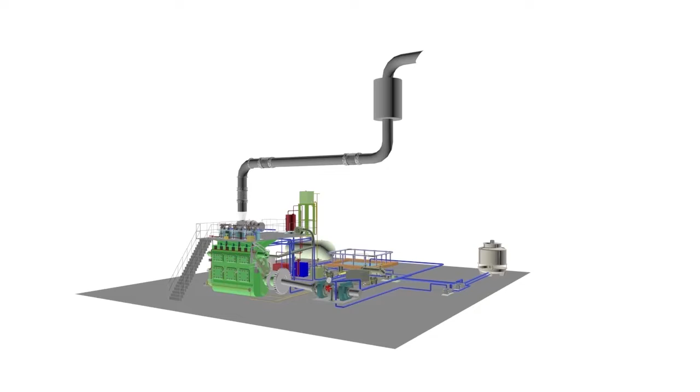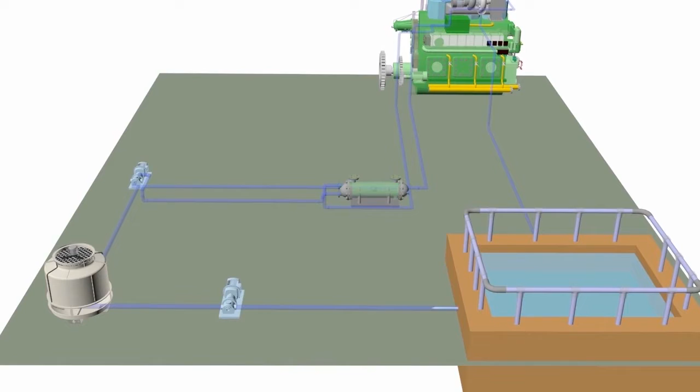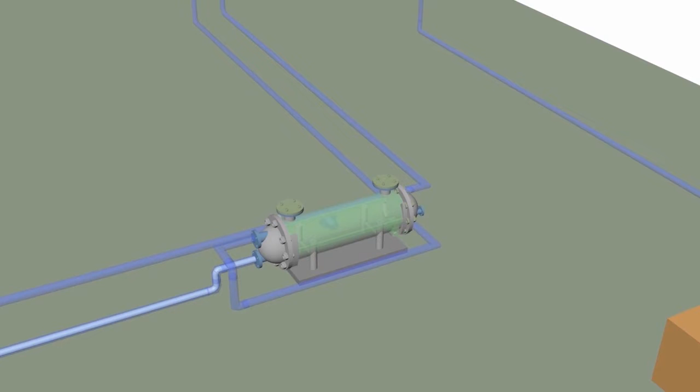The jacket cooling pump, of a centrifugal type, pumps the jacket cooling water to the L.O cooler where it cools down the lubricating oil of the main engine. The freshwater system also plays an important part in cooling the main engine jacket cooling system, where it will flow through the piping system through a manifold located behind the cylinders of the main engine.

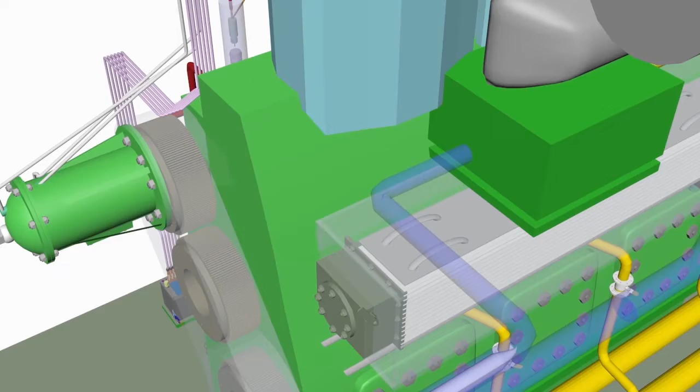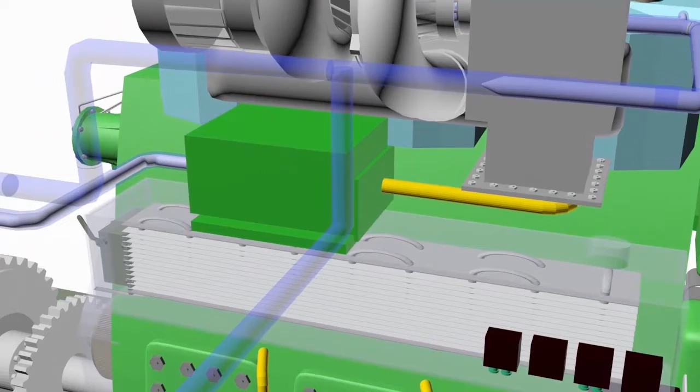It is then diverted to the cooling path of the liner where it will flow to the cylinder head for cooling of the cylinder head system, then will flow out to a series of ports, which then will flow to the water reservoir, which completes the cycle. Apart from that, if the temperature is still cool enough for the system, it will return back to the suction line of the jacket cooling water pump. This temperature and pressure is monitored by various thermometers and pressure gauges.

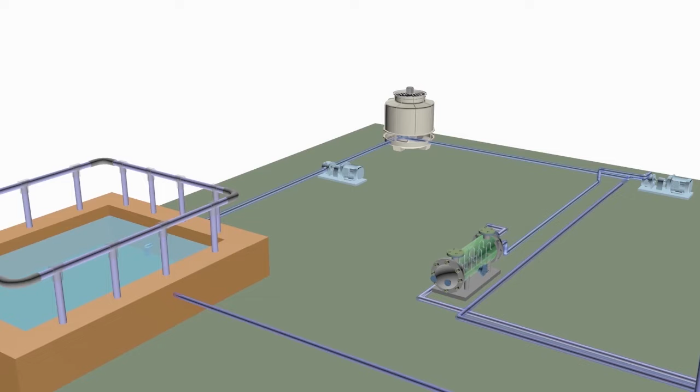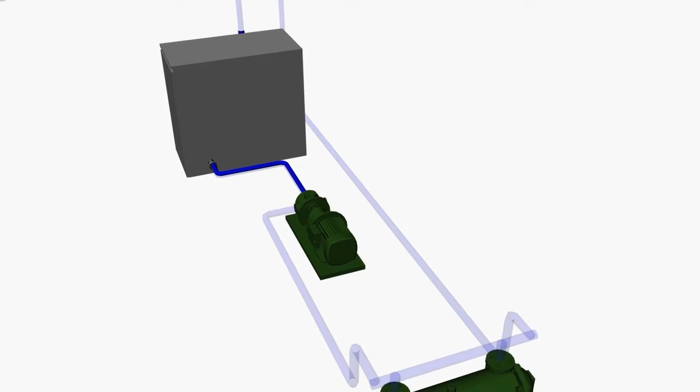Fuel injection valve cooling system. The fuel injection cooling unit is used for cooling fuel injection nozzles of the diesel engine, to keep the diesel nozzle automatically and lastingly cooled by circulating water or oil through cooling passages. Heavy fuel injectors are fitted with water-cooled nozzles. The operation starts from the expansion tank, where the circulating pump draws water from the expansion tank, where a series of thermometers are, directly to cool down the nozzle.

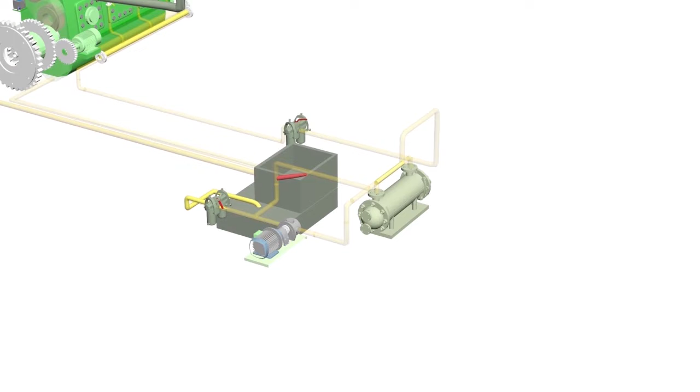After cooling the nozzle, the water then flows out to the sight glass used for detecting the flow of coolant through its nozzle, which then eventually flows back to the expansion tank. Main lubricating oil system. The main lubricating oil system comes from the main engine lubricating oil sump tank. The oil in the lubricating oil sump tank is pumped by the gear pump through a series of filters, where it will then go to the lubricating oil cooler.

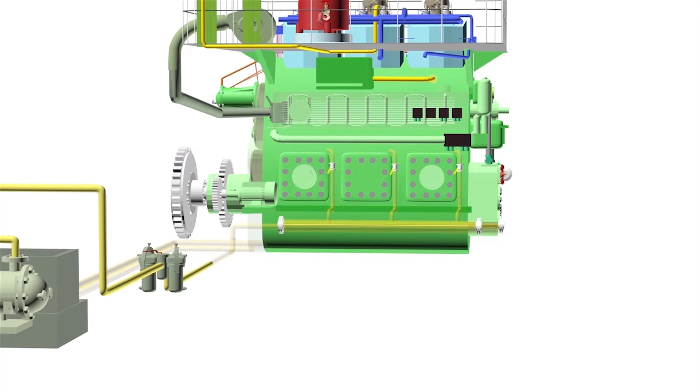This system is also fitted with the emergency lub oil pump to prime the lubricating oil so that it will fill the line before starting the main lubricating pump. When the lubricating oil enters the cooler, it will be cooled by the fresh water system that is used to cool the jacket cooling system. After passing the controlling valve, the oil will then be filtered by a second filter to ensure that any remaining particles are screened off.

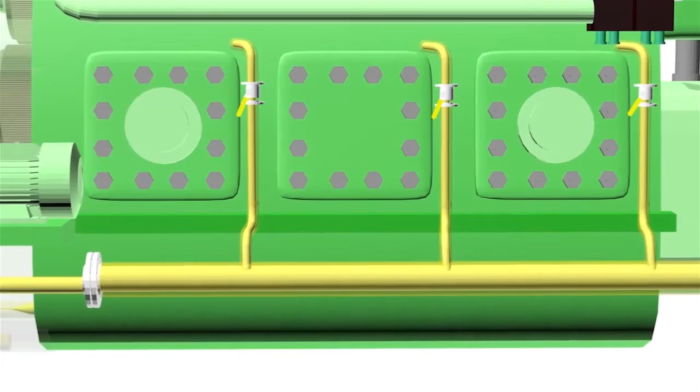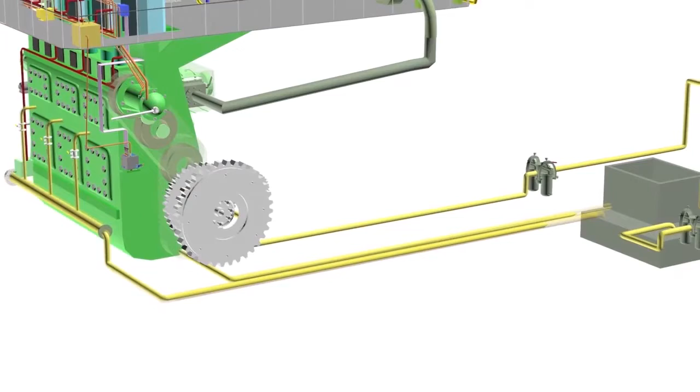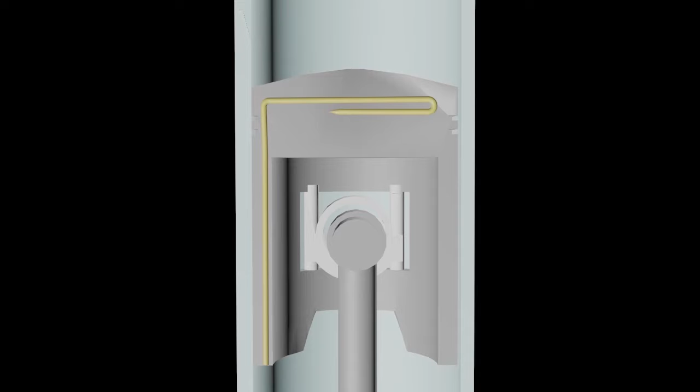Piston cooling system. The piston cooling system is used for cooling the piston crown to absorb heat incurred by the piston. The piston cooling system is a part of the lubricating system of the main engine. The lubricating oil which flows to the main engine lubrication system is diverted to a series of pipes where it enters the telescopic pipe from the underside of the piston.

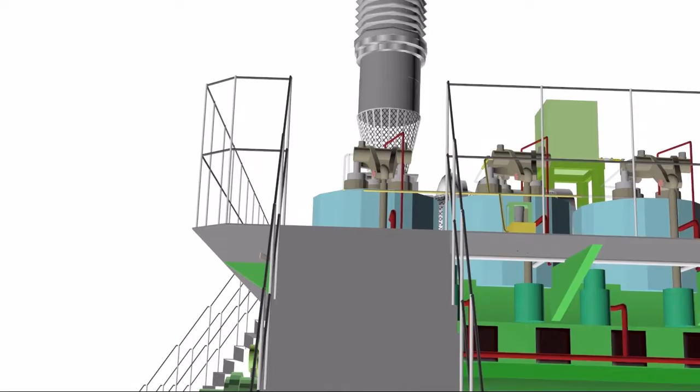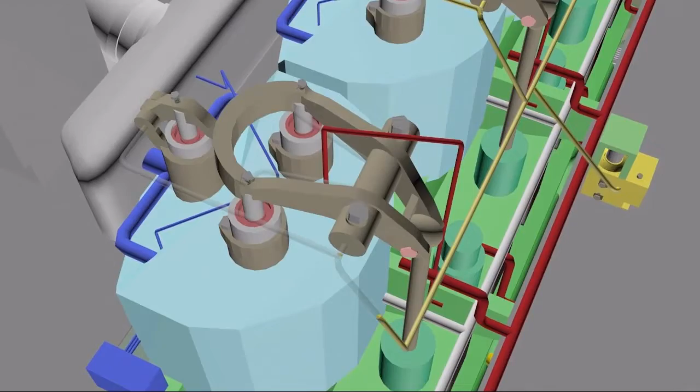Rocker arm lubrication system. The rocker arm lubrication is to provide fluent movement of the rocker arm by providing sufficient lubrication to moving parts such as push rods, bearing bushes, the push rod's ball ends, the rocker arm bearings and the ends of the valve stem.

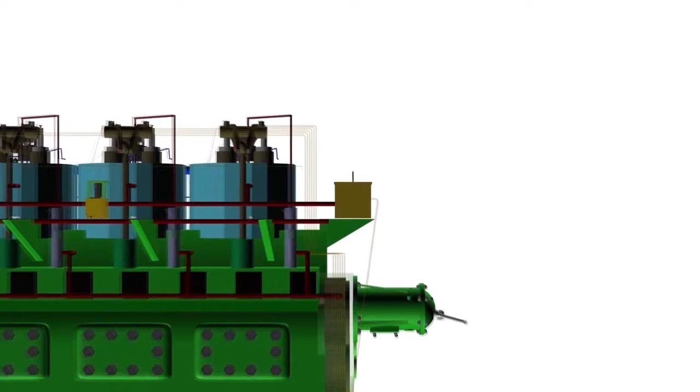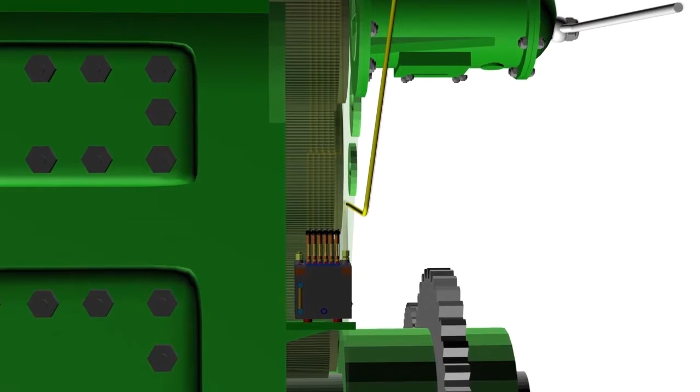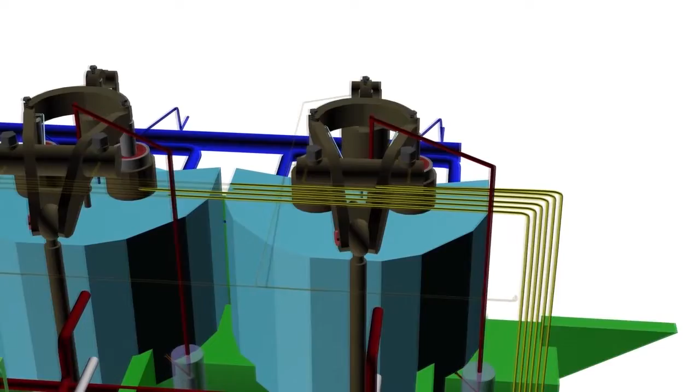Cylinder liner lubricating system. Cylinder liner lubrication starts from the cylinder liner lubricating oil tank. Then it flows to the rational lubricator. Then the rational lubricator will distribute lubrication oil to the cylinder liner at port and starboard of the cylinder liner through the lubricating quill. The lubrication oil will be sprayed at the internal liner surface, the piston ring, and will eventually be burned during the combustion.

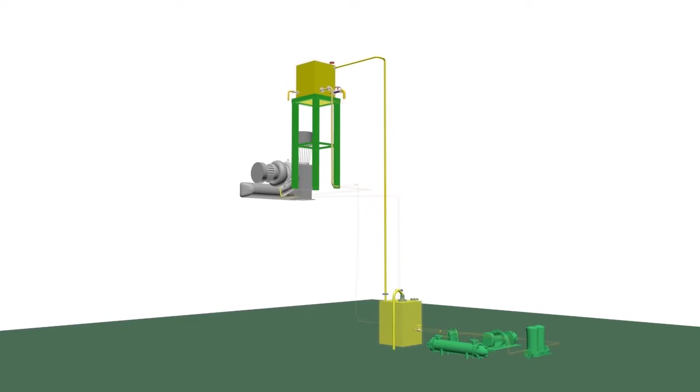Turbocharger lubricating oil system. The turbocharger lubrication is supplied either by an external or internal pumping system. The external system requires a positive displacement pump to supply oil from an external holding tank to lubricate the turbocharger bearings running at high speeds. It is very important that the lubricating oil is clean and free from metal particles that could scratch the bearings.

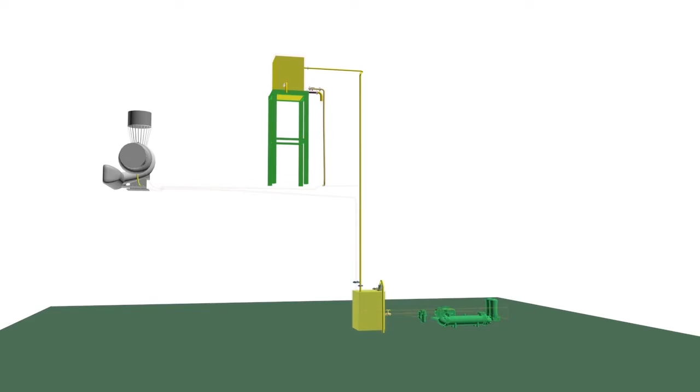The turbocharger lubricating oil system starts from the overflow tank; oil will be pumped by a gear pump to a series of duplex filters of magnetic type. The system is fitted with a gravity tank high above the turbocharger to ensure that at all times oil will remain inside the pipe. This is to ensure that no air can ingress into the system, creating an airlock.

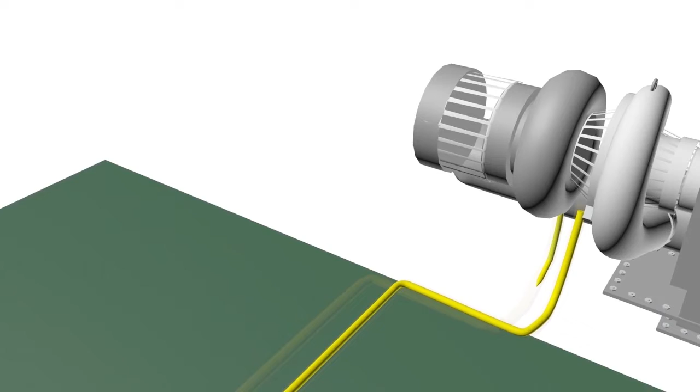Fuel oil system. Marine fuel quality can significantly affect the performance, operation and maintenance of the diesel engine. To better understand the important effect of diesel fuels on the engine itself, it is important to have a basic understanding of fuel characteristics, properties and contaminants which impact the operation of a diesel engine and its fuel handling and

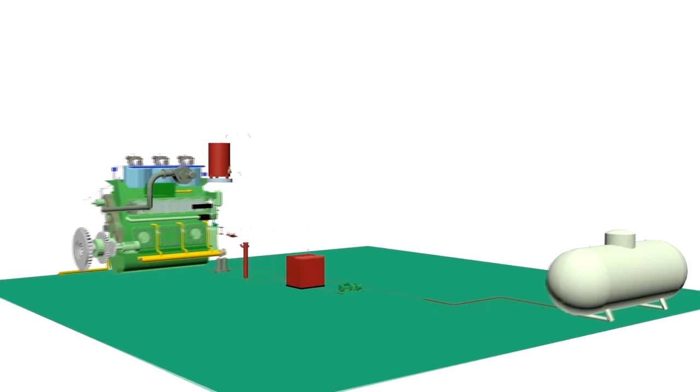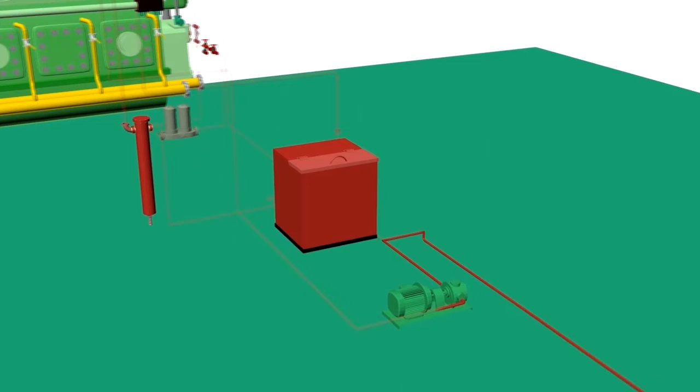fuel treatment systems. The fuel oil system for a diesel engine can be considered in two parts, which are the fuel supply and the fuel injection systems. The fuel supply of this plant starts from the fuel oil storage tank, where it will be transferred via a fuel oil transfer pump to a gravitational fuel oil service tank.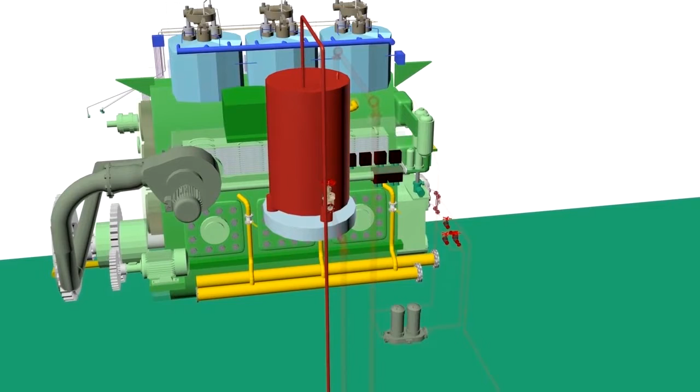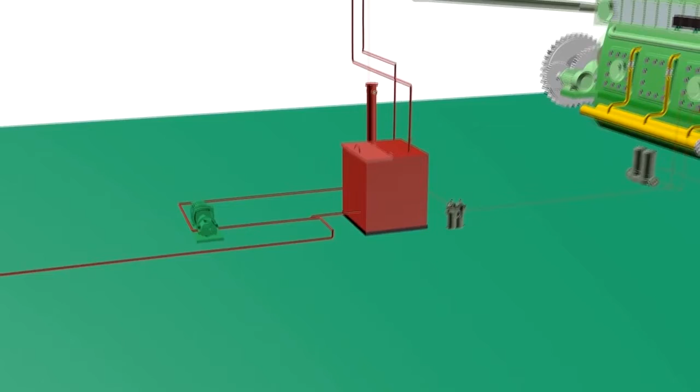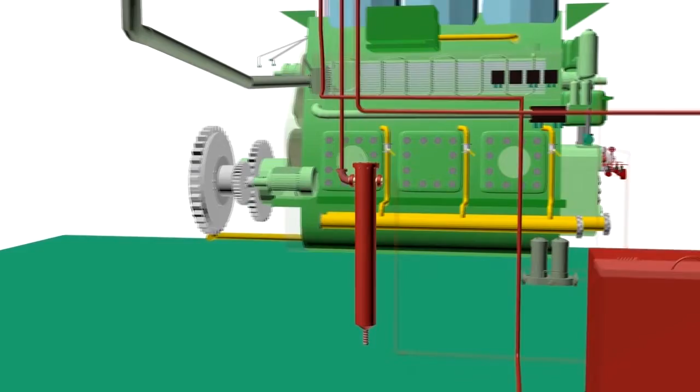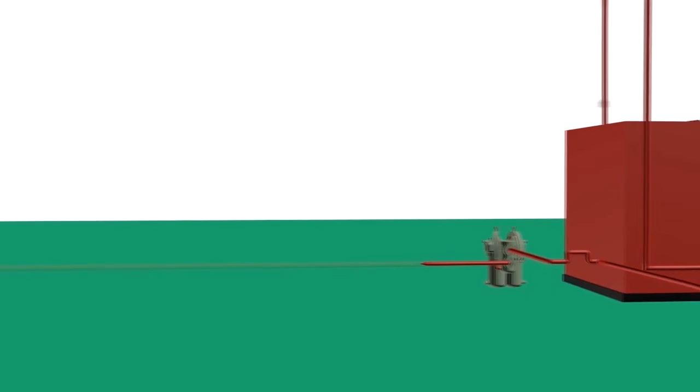During operation the oil is pumped by a gear pump which is attached to the main engine, driven by a set of running gear through the main engine gearing system. Fuel oil will then pass through a series of duplex strainers to clean any particle matter that could choke the fuel injector. After passing through the service pump it will pass through a flow meter where fuel consumption is monitored.

A second duplex cleans fine metal and sludge from the fuel oil system. This oil will then pass to the fuel injection pump where the pressure will be raised to the fuel injection valve located in the center of the cylinder head.

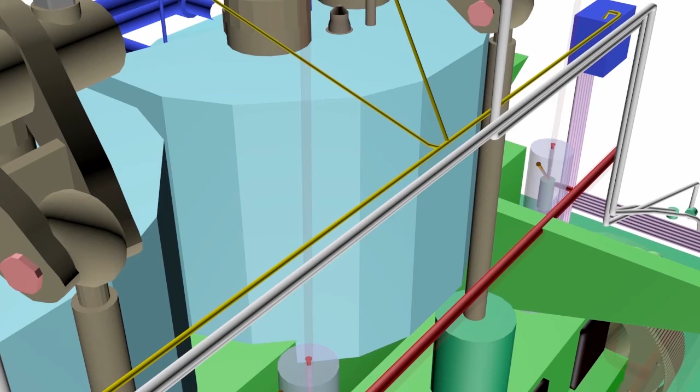The fuel injection pump is operated by a set of camshafts driven by a gearing system at the end of the engine chain drive. This pump is controlled and regulated by the governor through a series of linkages that set the amount of fuel supplied to the injector, and as a result the speed of the engine.

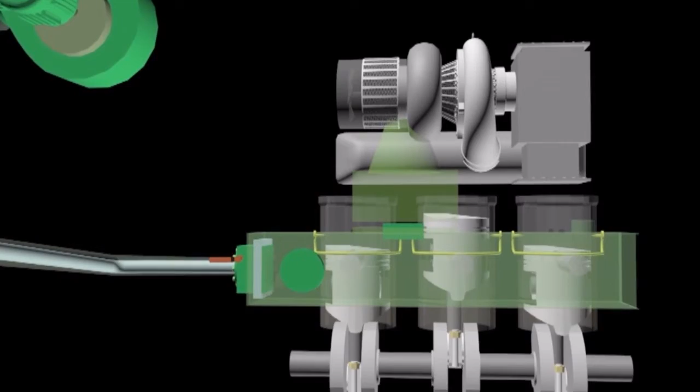Scavenge air system. Scavenge air is provided by an auxiliary blower when the engine is running at slow speed. The auxiliary blower, driven by a motor at high speed, delivers air to a damper, which then will enter the scavenge space before it enters the scavenge port. After passing the port, the air will mix with fuel in the combustion space inside the cylinder and burn to produce power to drive the engine.

After the engine has reached a constant speed, the duty of the auxiliary blower will be taken over by the turbocharger, which draws air through a filter and compresses it to a constant path into the air cooler, where the air will be cooled before it enters the scavenge space.

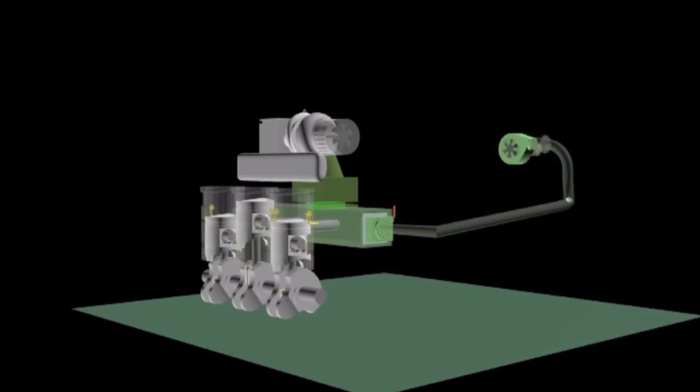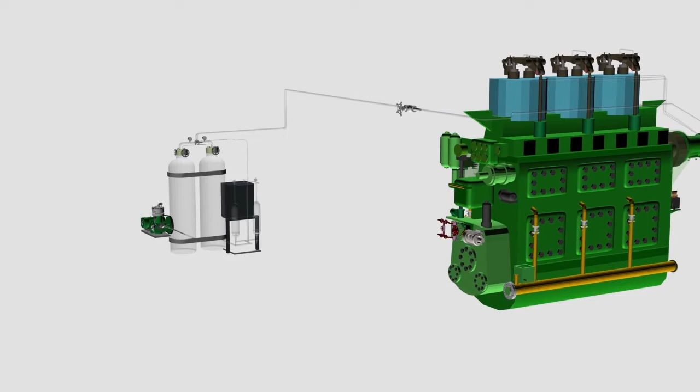Starting air system. Large marine diesel engines are started using high-pressure compressed air. The air is admitted into the cylinder when the piston is just past TDC and continues until just before the exhaust valve opens. There is always more than one air starting valve open, a situation known as overlap. This ensures that the engine will start in any position.

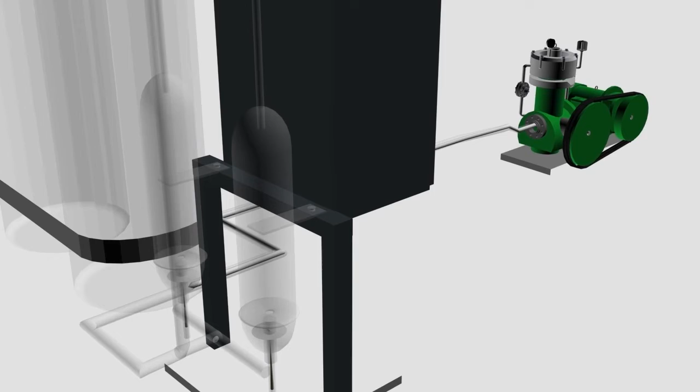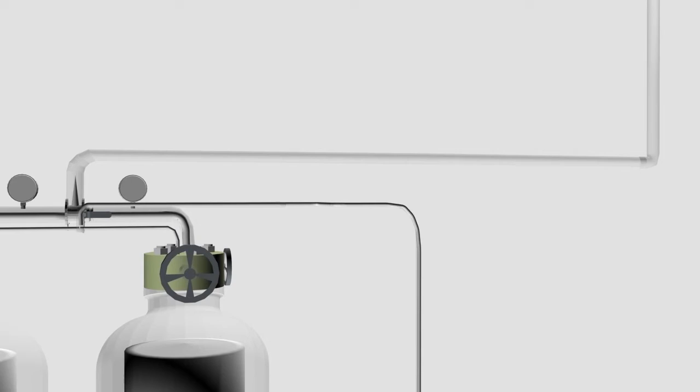The starting air of this plant starts from the two-stage air compressor that compresses high-pressure air to the air dryer, and it is stored in 2 air bottles. To start the engine, air will be supplied to the isolating valve through a main starting air valve fitted at the air bottle. The isolating valve is fitted to prevent starting air line explosion due to a faulty starting air valve. After passing the isolating valve, it will be divided into 2 flow paths.

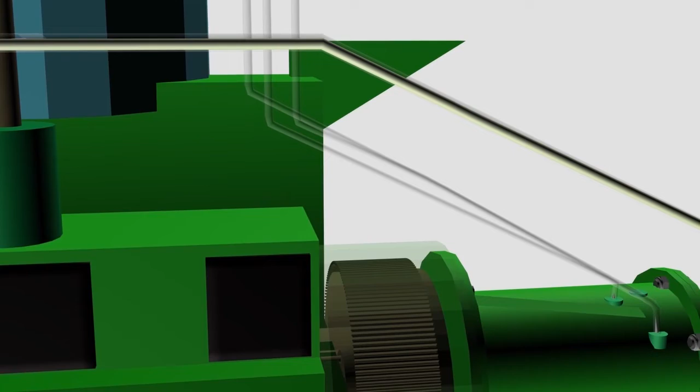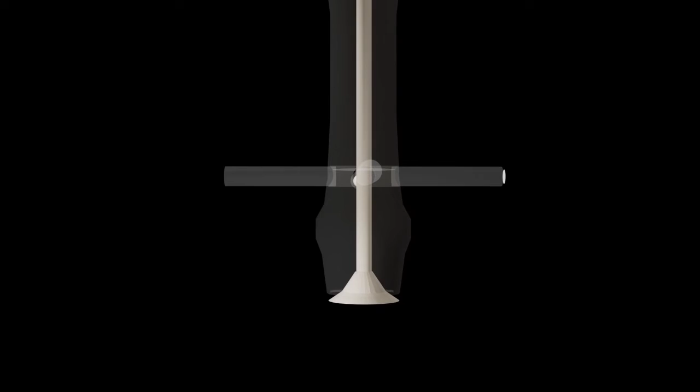One, which is the main starting air, will be ready just before the entrance to the starting air valve fitted to the cylinder head, while the other will go through the set of distributors that correctly time the unit that will first start the engine. It will then direct pilot air to the starting air valve that will let the main starting air enter the designated cylinders.

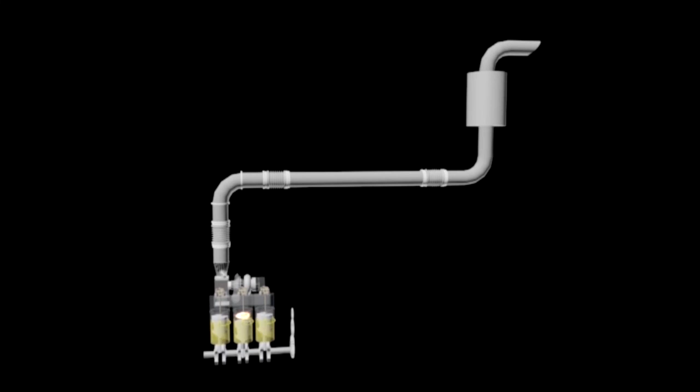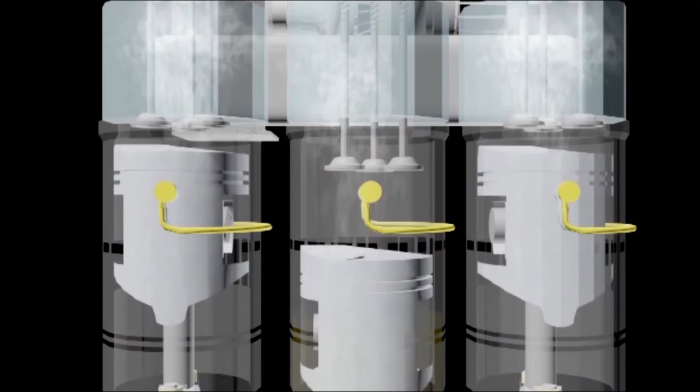Exhaust system. Exhaust comes from combustion of fuel and air inside the combustion chamber. In this plant, the exhaust gas of the combustion chamber is removed through the exhaust valve driven by a rocker arm that has been pushed by a push rod from the camshaft. The high pressure exhaust gas that is removed by the uniflow method will then enter the exhaust manifold, where the pressure and temperature will equalize.

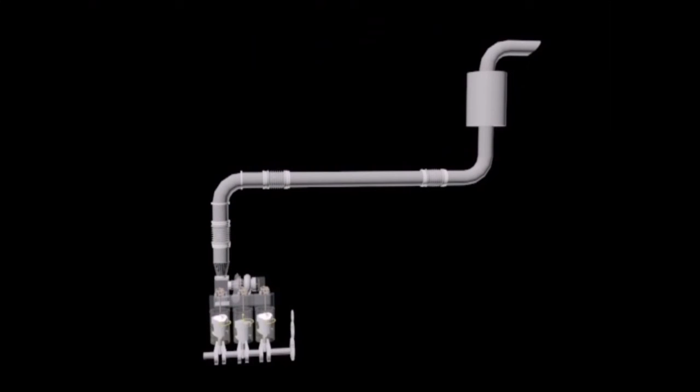This exhaust gas will then flow to the turbine side of the turbocharger, where the high pressure hot gas of the main engine will drive the turbocharger. This results in a high rotational speed of the turbine and thus also of the blower of the turbocharger.

Conclusion. After studying this system, students can prepare themselves before and during practicals in the 2-stroke diesel engine with appropriate knowledge and skills.